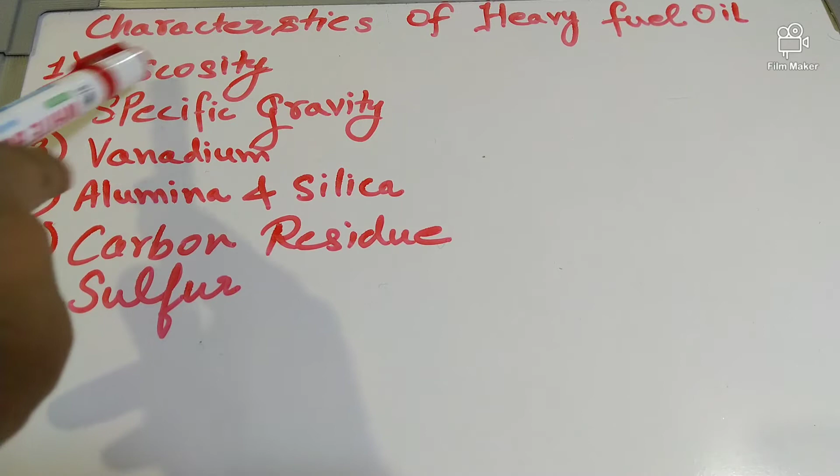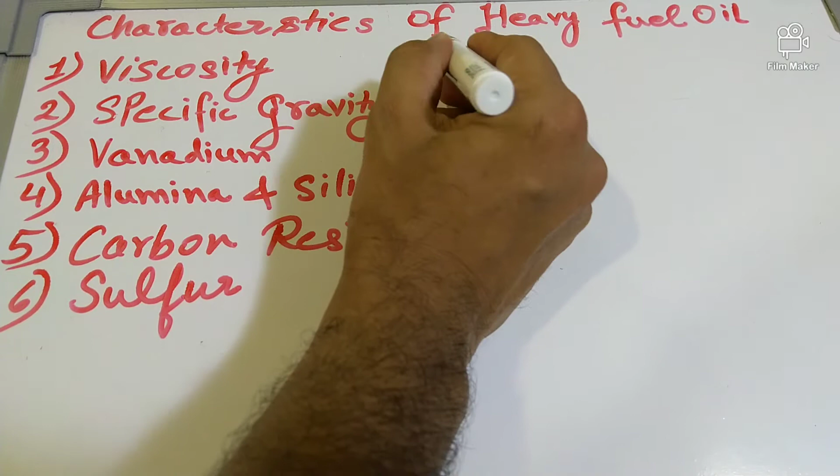The first and most important characteristic is viscosity. Viscosity fluctuates widely in case of heavy fuel oil. The recommended value for viscosity is around 11 centistokes (CST) to 14 CST. It is very important to maintain the viscosity in this range for proper combustion.

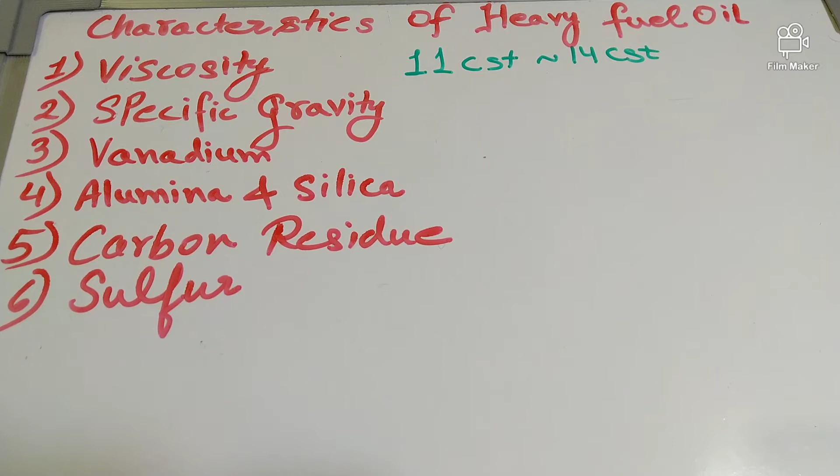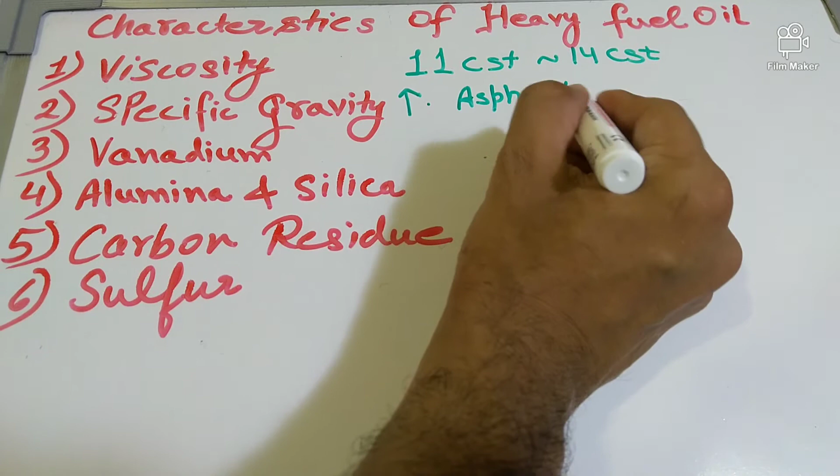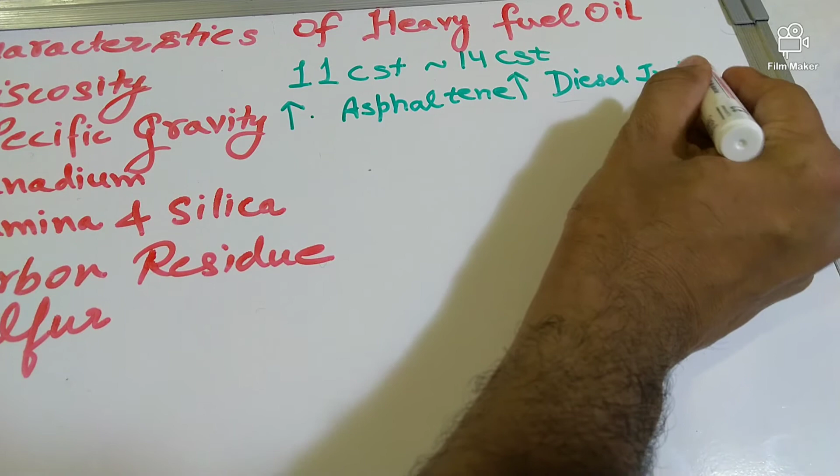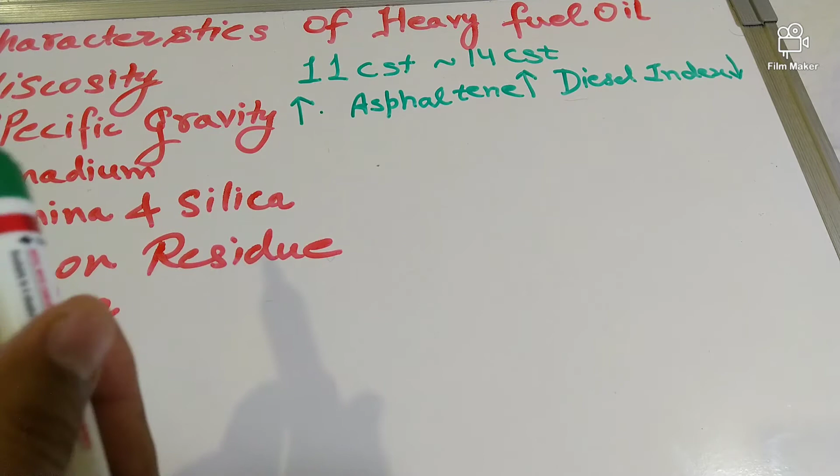The second important characteristic is specific gravity. If the specific gravity level is high, it means the asphaltene content will be higher. If asphaltene is higher, the diesel index will be lower. Because of the high molecular aromatic hydrocarbon content, ignition performance will be lower.

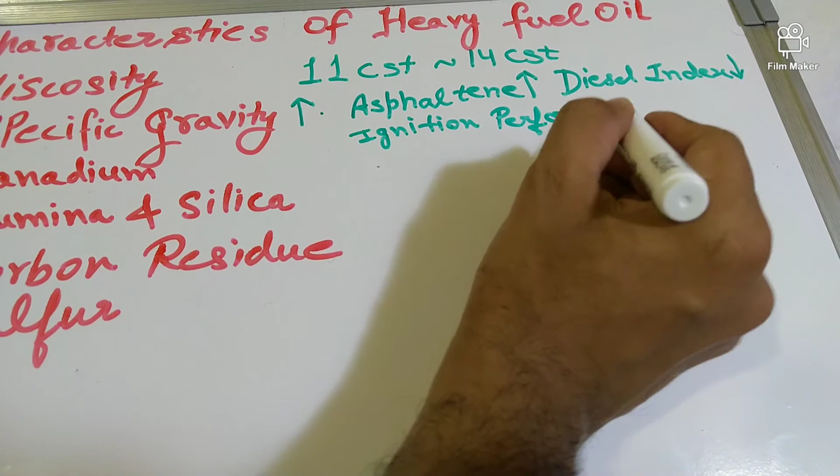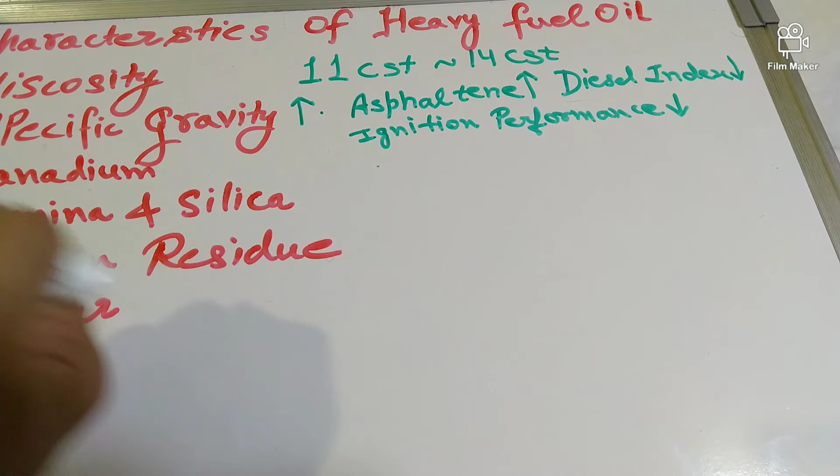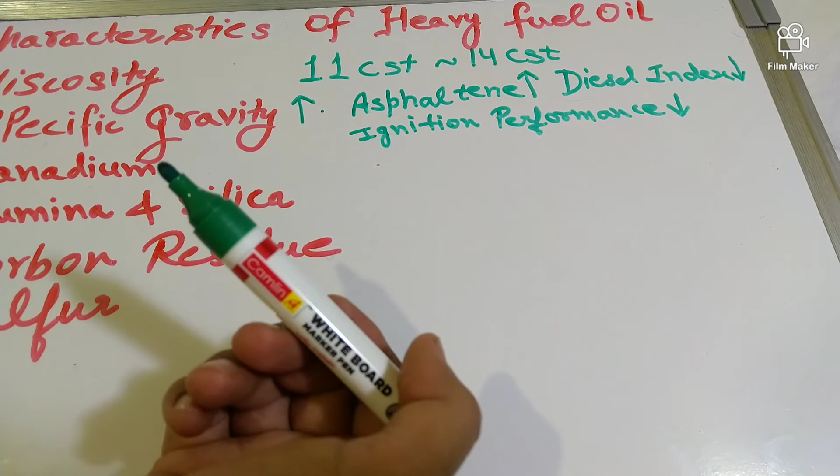Ignition performance will reduce because asphaltene content is high, so ignition performance will reduce. How do we improve the performance in this case? We can improve it by using a higher compression ratio, by designing the optimal combustion chamber shape and structure for the engine. Second, we do preheating for the engine, and pre-treatment of the fuel oil should be carried out so that asphaltene content will be reduced.

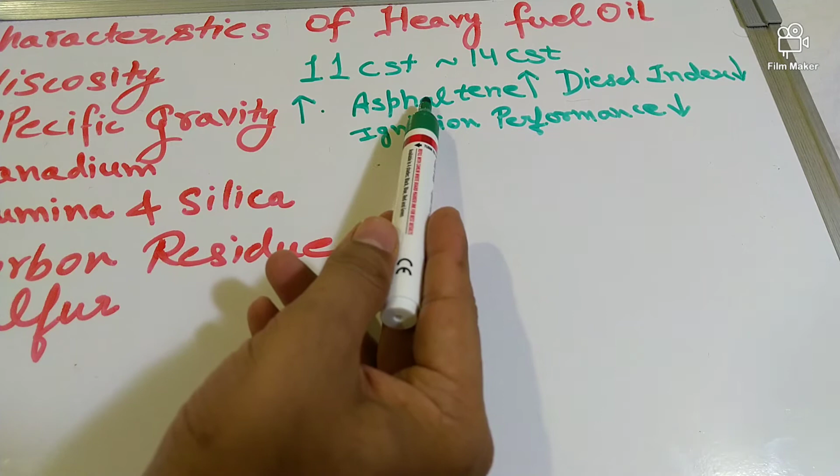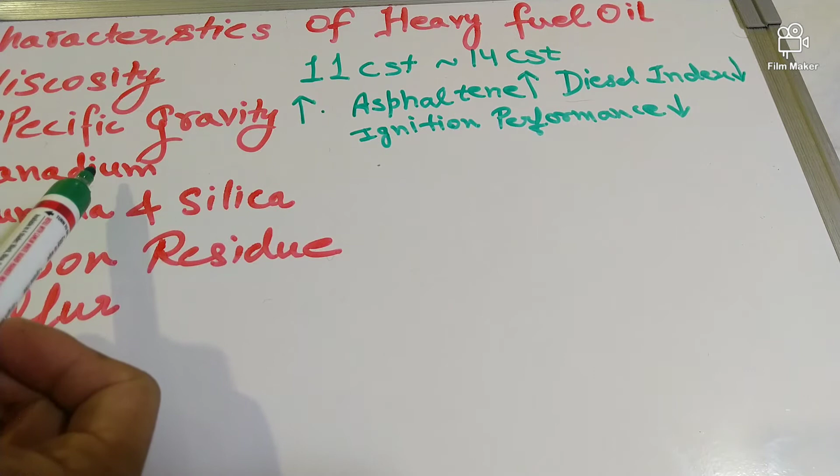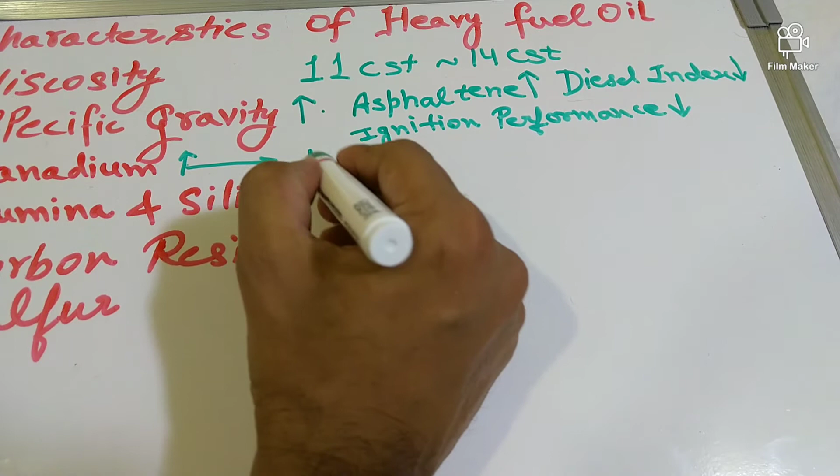The next important characteristic is vanadium. If the vanadium content is higher in the fuel oil, high temperature corrosion of the exhaust valve will take place. If this vanadium content becomes higher, then high temperature corrosion will occur on the exhaust valve.

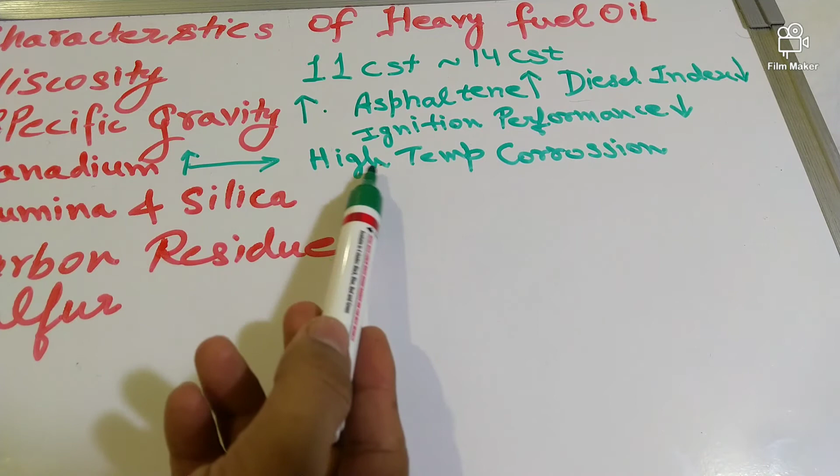How do we prevent this? To prevent this, cooling of the exhaust valve face and use of corrosion resistant material are necessary. We will provide cooling of the exhaust valve face, and use of corrosion resistant material is required.

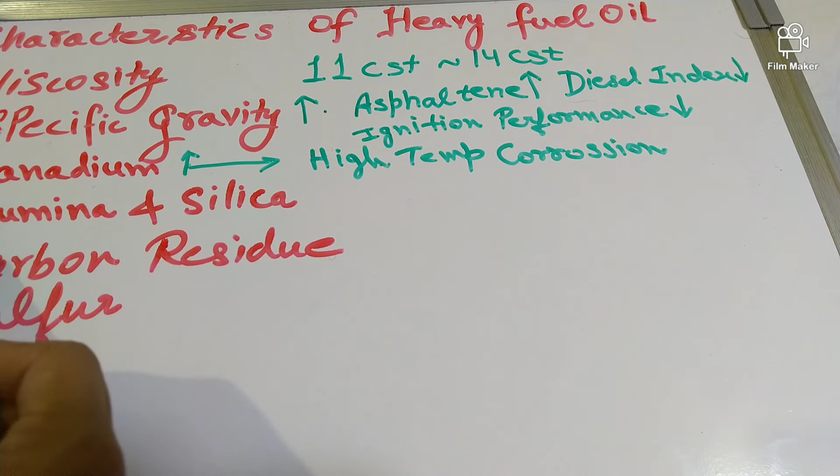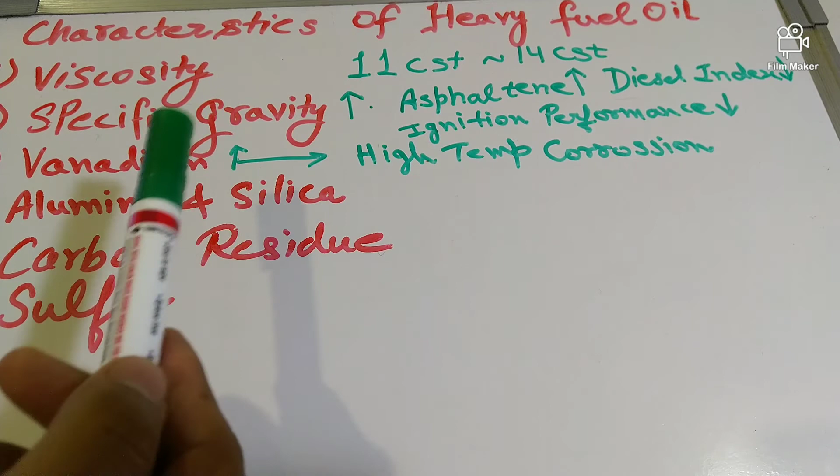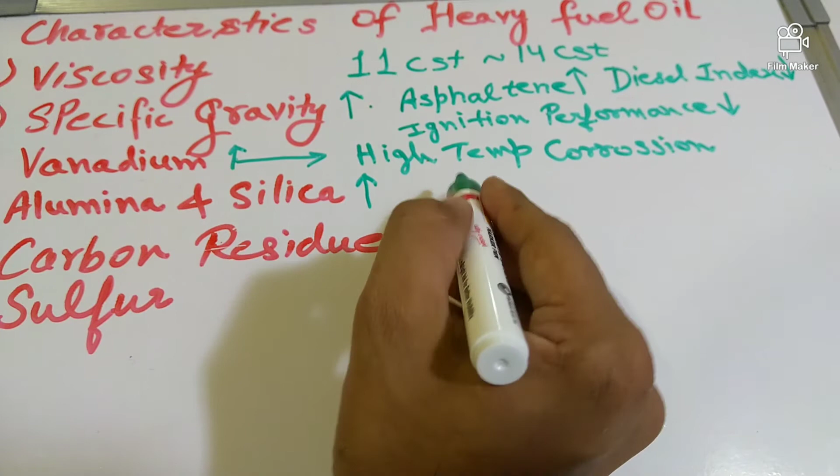The fourth important characteristic is alumina and silica. Alumina and silica are the catalyzers in fluid catalytic cracking fuel oil. What happens if the alumina or silica catalyzer content is high? This will cause abnormal wear in engine sliding parts, increasing wear in these parts.

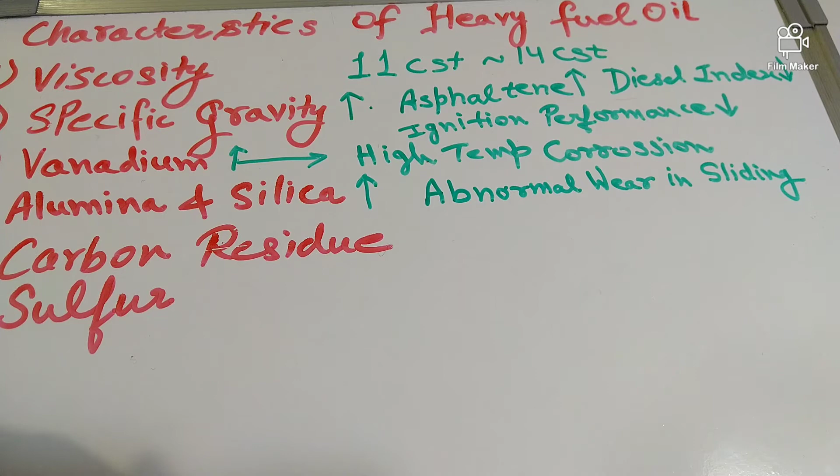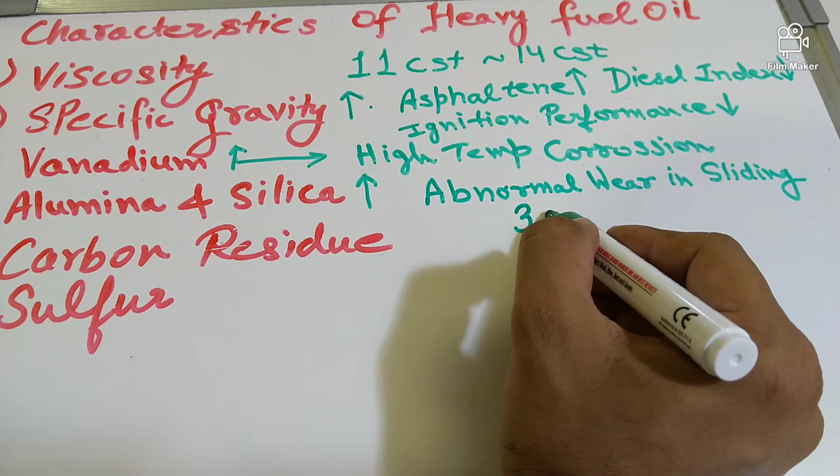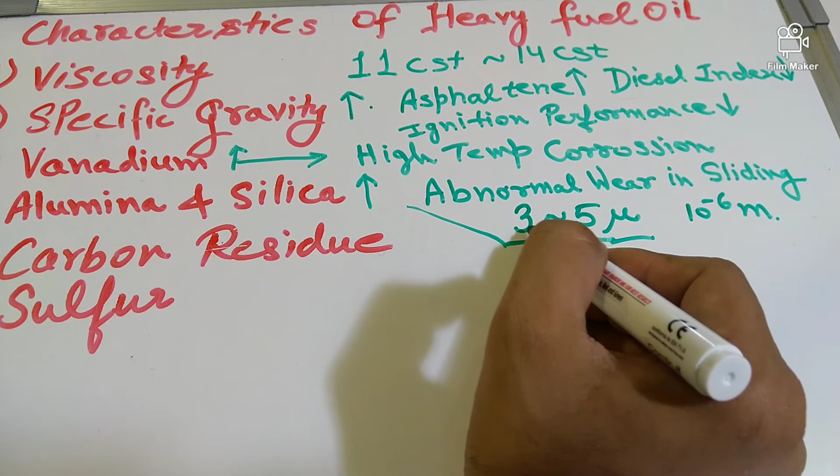How do we deal with this? We have to install proper pre-treatment equipment to deal with this kind of oil, so that the wear particle size should not be more than 3 to 5 microns. A micron means 10 to the power minus 6 meters. So we have to maintain the oil to remove particles of size more than 5 microns.

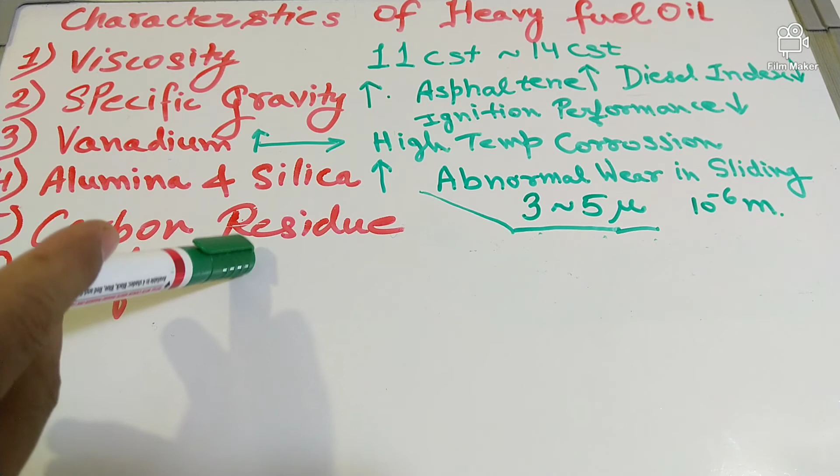The next important characteristic is carbon residue. Excessive carbon residue will cause combustion products to remain in the combustion chamber, especially in the case of low load operation.

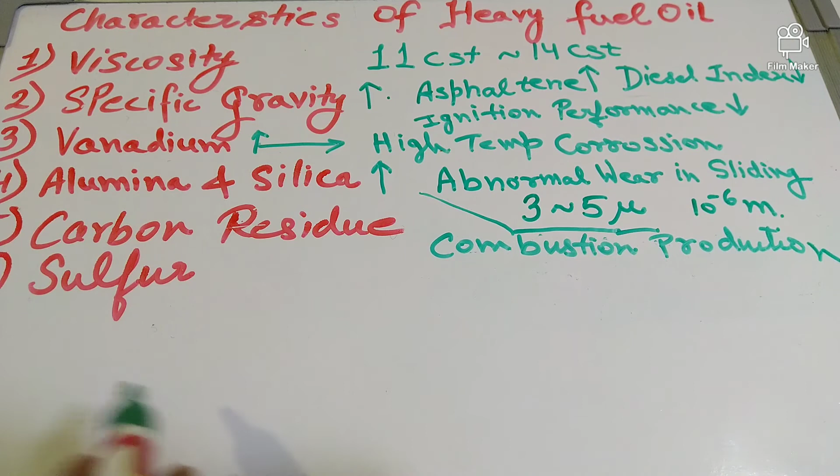Such residue on the sliding parts of the engine will result in excessive wear, so the wear rate will be higher and lube oil consumption will increase. How do we deal with this problem? The engine must be designed to reduce the adverse effect of the combustion products.

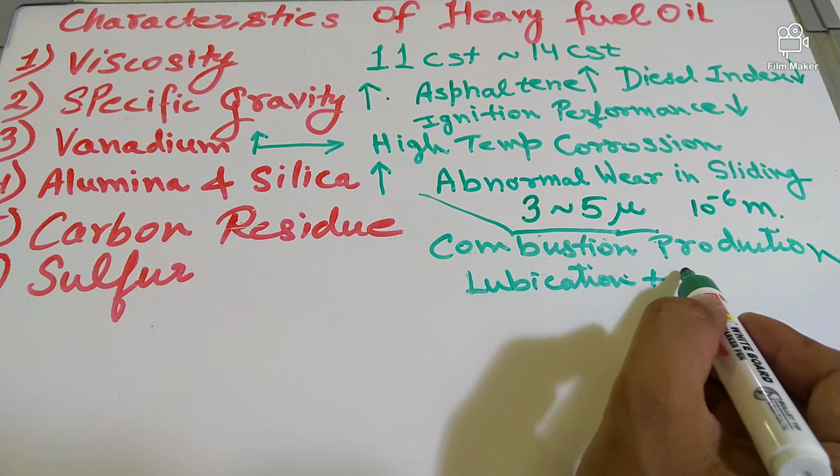Regarding wear, lubrication should be provided properly and good quality material components should be employed. Higher material quality of engine components and proper lubrication should be provided, and the lubrication should be very efficient, with higher material quality for the engine components.

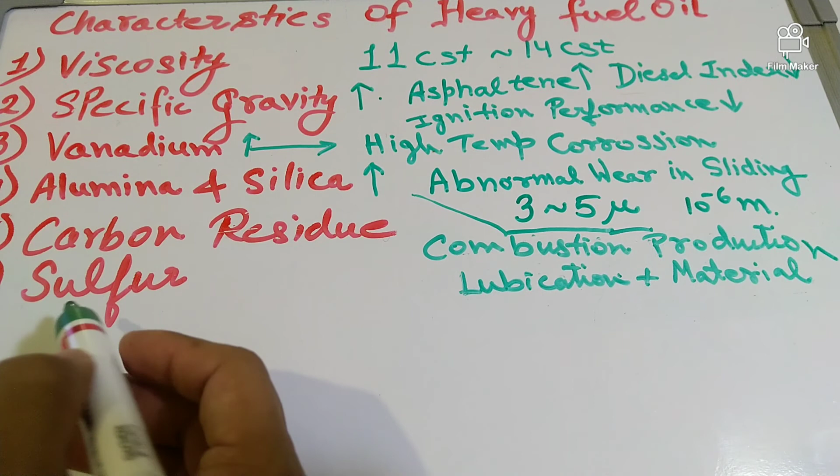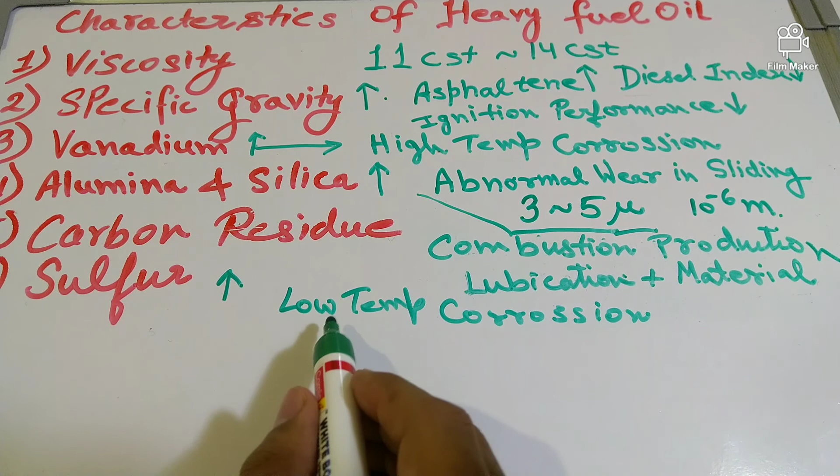The next characteristic is sulfur. High sulfur content will cause low temperature corrosion of the combustion chamber. To deal with this problem, the temperature of the combustion chamber must be kept at an appropriate level, so that it will not cause low temperature corrosion.